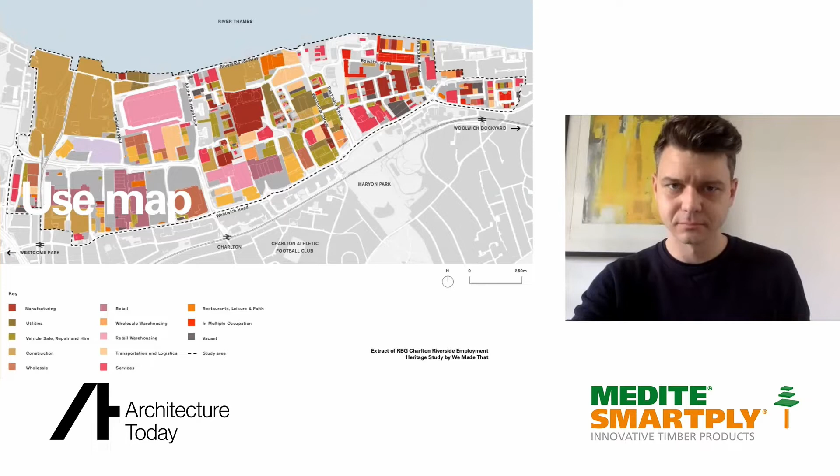The Charlton Riverside area, like all areas of London, is under immense pressure to transform and move with the times. And this is an extract of the Charlton Riverside SPD that imagines a mixed-use development coming forward for the area, and certainly changing drastically from the industrious heritage.

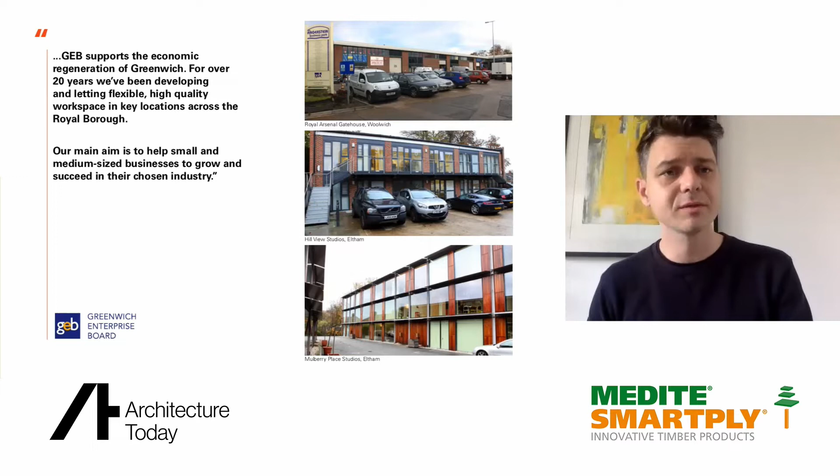So we were approached by the Greenwich Enterprise Board, who are a small organisation that act as landlords, providing industrious tenancy or premises for light industrial, small, medium-sized businesses. Their ethos is really about providing very good quality workplace that's suitable for making, creating, manufacturing, distributing, but to do so at an affordable rate, and provide letting arrangements that are flexible and allow businesses to move, expand, contract, and really foster growing enterprise.

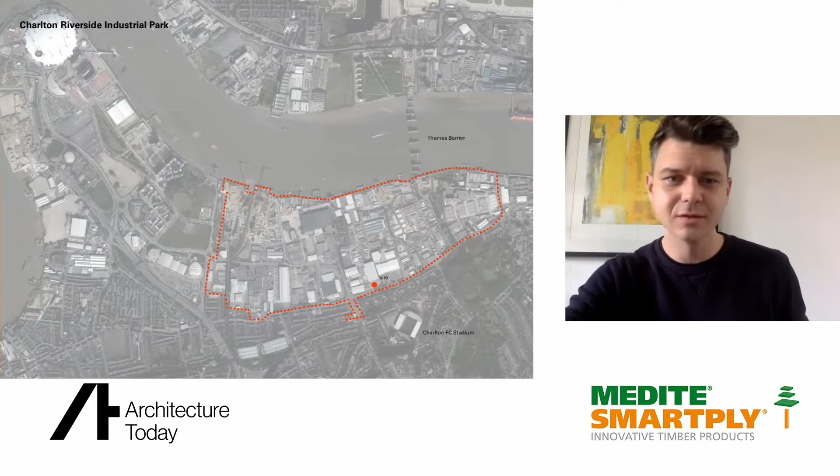So the site itself is located on the south of the Charlton Riverside industrial area. It's located on Woolwich Road. You can see the Thames Barrier Park there, and the Charlton Football Stadium to the bottom of the screen. The site's really nestled right on that southern periphery of the industrial area, and our immediate neighbours are Selco, building merchants, with an industrial park to the east there that provides large-scale retail.

But to the south of Woolwich Road, it's defined very residential, and it's that periphery that's very interesting for the site, that periphery condition.

Our approach for the site was really in review of the site conditions, and we established that this periphery condition that the site has on the industrial park gave us the opportunity of creating a billboard feature for the site that is in part signposting the industrial uses for the area, but also needs to be of architectural merit.

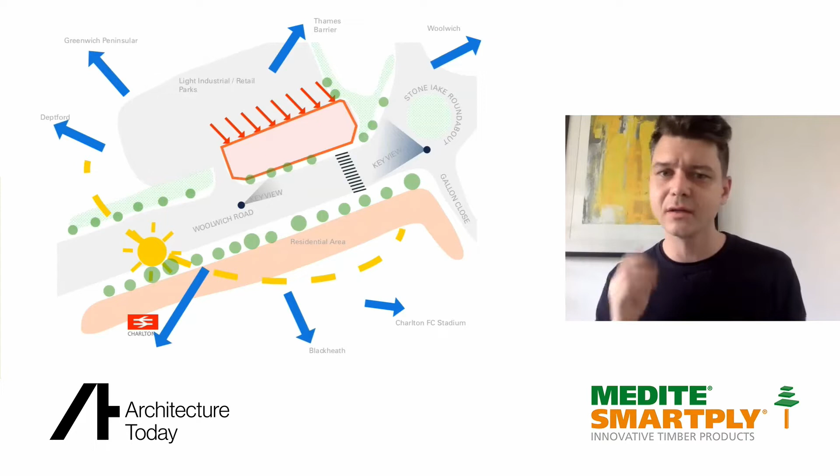This would create a pleasant visual connection or approach from Woolwich Road, of which there are two key viewing axes of the building, from the roundabout on the right hand side of the image and Woolwich Road to the left.

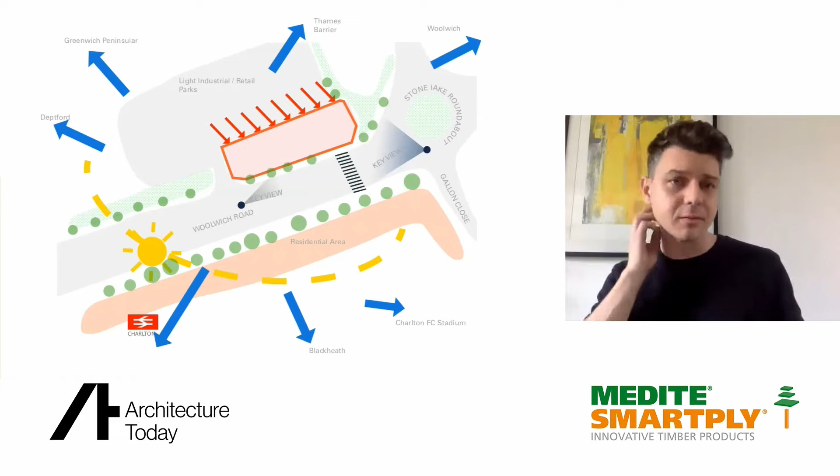We were aware that once you get above the first or second floor, amazing view corridors open up around the site, and these are shown in the blue arrows towards the barrier, Greenwich Peninsula, even towards the stadium I mentioned.

The other key consideration for us is the solar diagram, shown in yellow. The site benefits from really great daytime solar sun aspect as the sun moves around the south, but we're very aware that could lead to quite intense sun or solar gains from the west and setting sun.

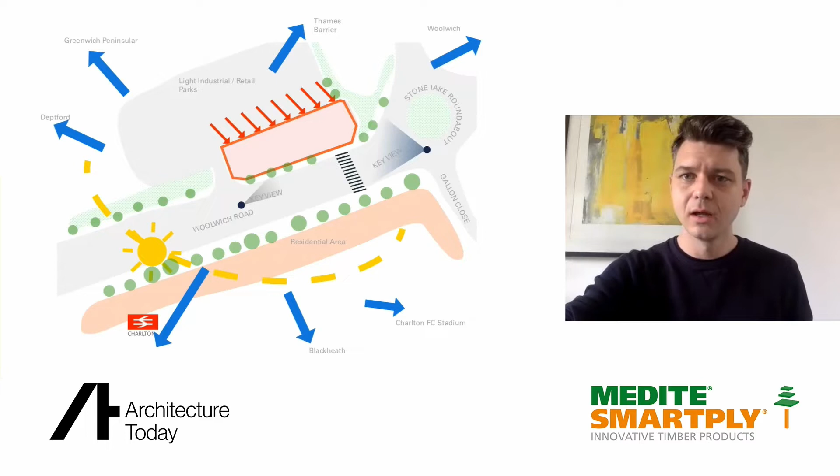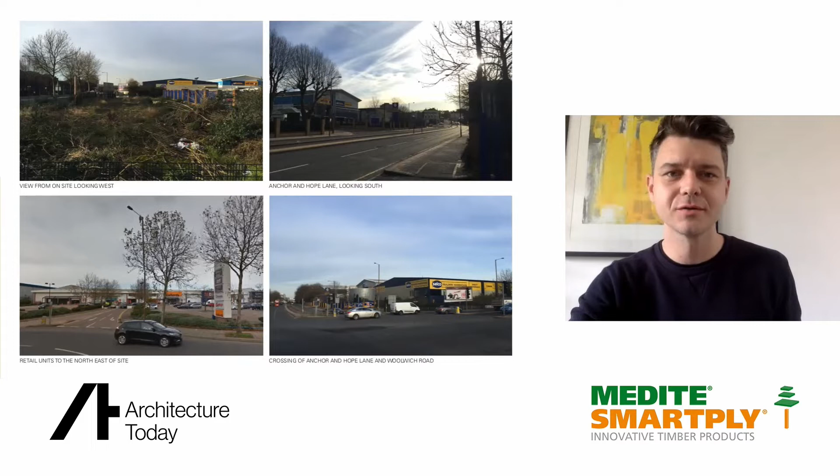In terms of the site, it's pretty much what you would expect from this part of London. Very large industrial sheds for retail and industrial uses, and the site itself quite overgrown and unkempt.

Our brief from GEB was to create approximately 14 workshop units that would be around 100 square metres in size, ideally with standardised proportions.

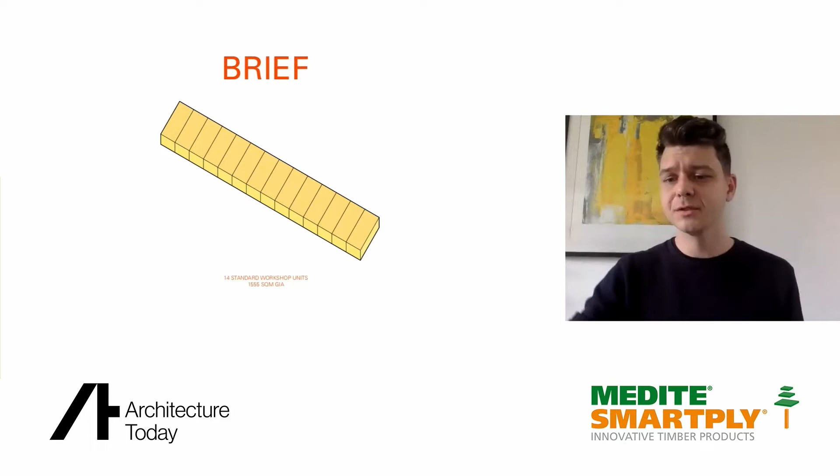So we came up with a diagram whereby we would have servicing provisions, loading and the like on the ground floor, and then a series of units that are stacked vertically on the site and accessed through a lift and stair placed at the back.

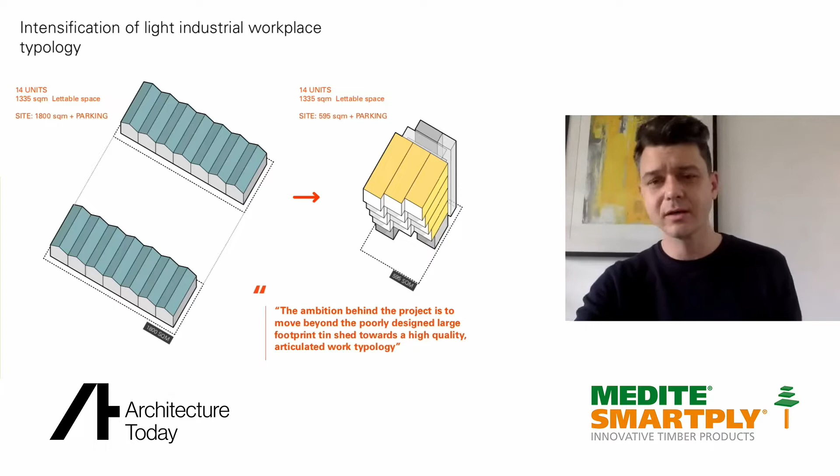This vastly reduces the site area required to create these units. You can see approximately 1,800 square metres on the left for the low-rise sheds, and just shy of 600 square metres building footprint for our version. So a very efficient way of creating the floor area needed.

We then carved away a profiled, progressive cantilever to the west side, which allowed various lengths of unit to be created within the building. This would allow the units to appease different types of users, but also ideally allow users to move throughout the building as their operations expanded or contracted.

The cantilever also assists the solar shading to the west, providing more shading to that aspect and hopefully reducing the solar gain in the afternoons, and creates this visually arresting profile. So the image on the right is the final building.

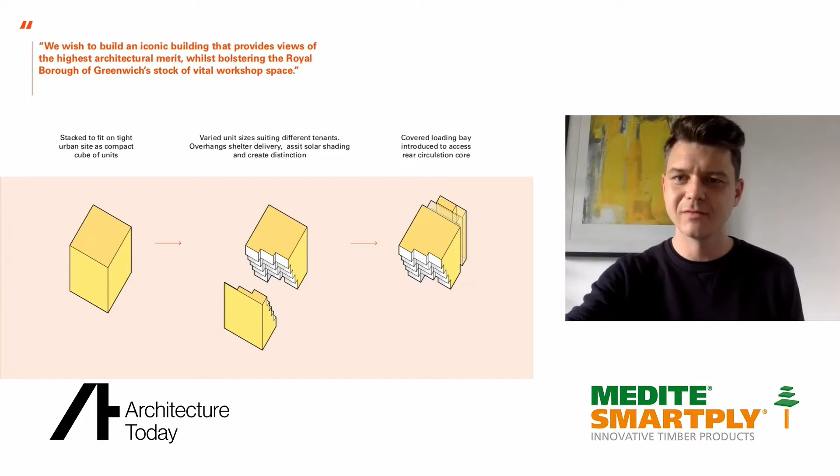As a practice, we have a keen interest in timber buildings, and this was really an opportunity to explore that typology and construction method in further detail. We really like this analogy of the log stack arrangement, whereby the building is created of timber, and the lengths of timber are effectively changed to suit this progressive cantilevering form that expands on the west side.

To talk about the arrangement of the building, the ground floor works quite hard in providing the main entrance and the basis of the vertical circulation through the building.

There's a central loading bay sized to allow a goods vehicle to come and reverse in, with direct access to the lobby and goods lift. There's then a stair in the top right hand side of the diagram, allowing movement through the building, and otherwise a bin store completes the communal services of the building, with 2 individual units on the ground floor.

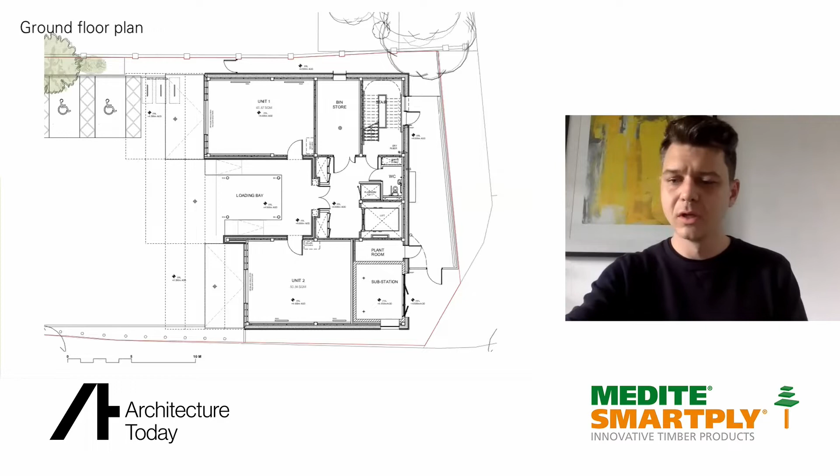There are then 3 units on each floor as you move up the building, arranged as shown in the plan, all accessed from that main circulation lift.

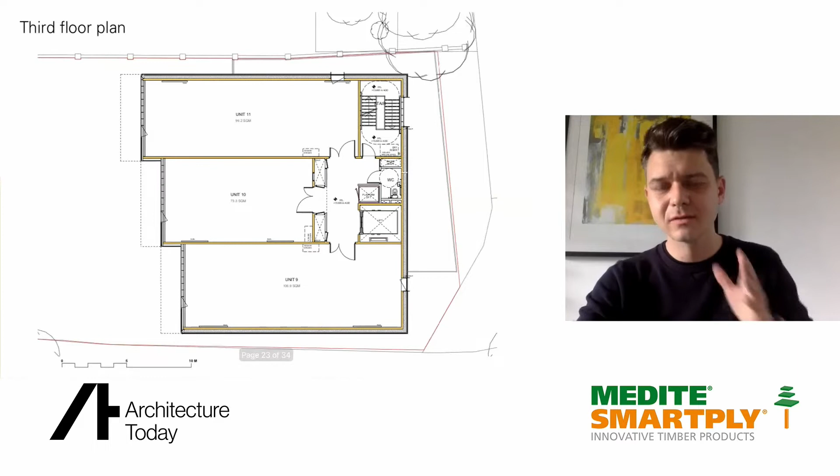As you move up the building, the progressive cantilever means that the size of the units expands up the building, creating units up to 115 square metres at the top.

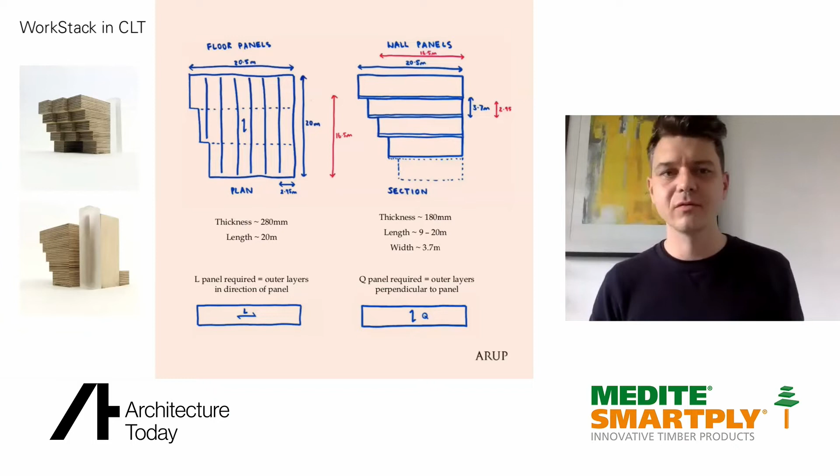One thing to say on the structure is that all the cross-laminated timber is left exposed in the interior of the building. For fire control, the width of timber allowed provides for a charring zone on one side of the timber. So if there's a fire, the outer surface will char and become impervious to further deformation of the overall panel—a very efficient and elegant way of controlling fire within the building.

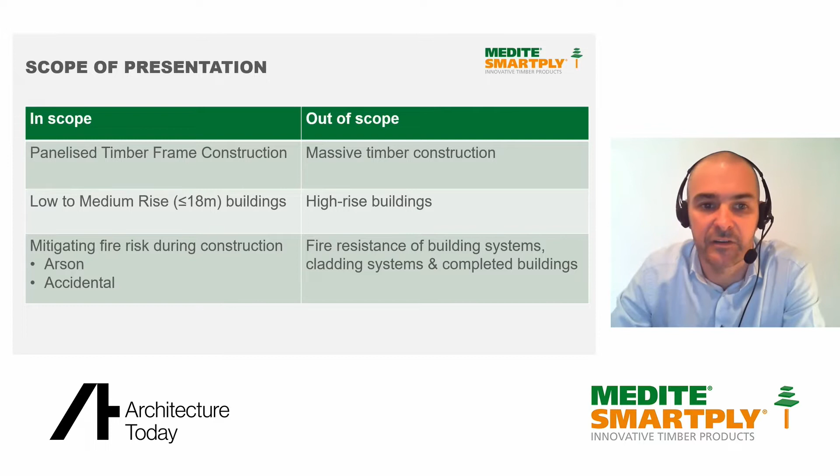Getting straight into it, let's look at the benefits of flame retardant treatment. There are 4 stages in a fire: ignition, fire growth, the fire fully develops, and the fire decays. Fire needs 3 components to start and keep going: a heat source, a fuel source, and oxygen.

As the fire continues to grow, it continues to consume the fire load, the furniture and everything in the room, eating away at that fire load. Eventually when the fire load is gone, it decays over time. The important part is that from ignition, the fire growth stages are very rapid and the temperature rise is quite severe.

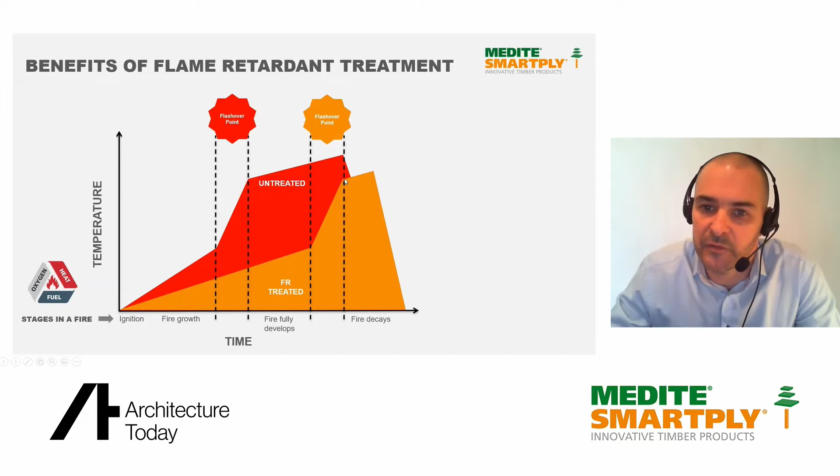The same thing happens once flashover happens. The fire engulfs the room, really consumes all of the wood, all of the materials in the room, and eventually it dies out in the same way.

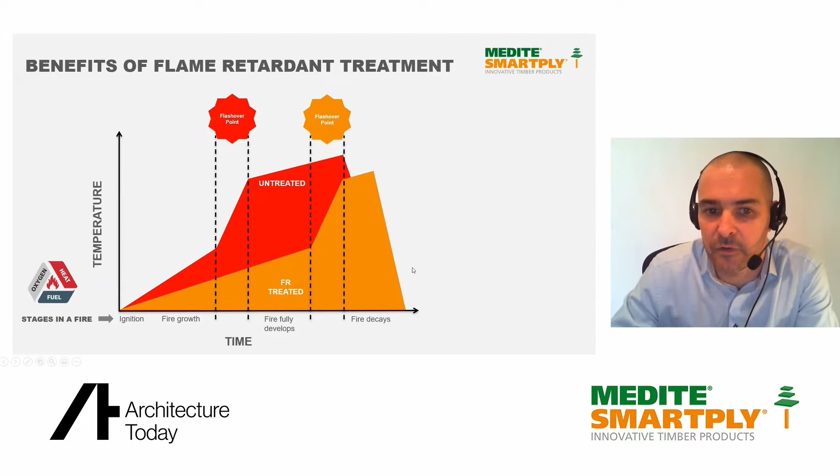The key to performance here is the enhanced reaction to fire properties of the treated wood, which slow down the growth phase of the fire, preventing that small fire from becoming a big one. This gives occupants time to escape the building, or site workers time to escape during construction. Small fires will be extinguished more quickly, preventing damage, and are far more effective than firefighting a fully developed fire.

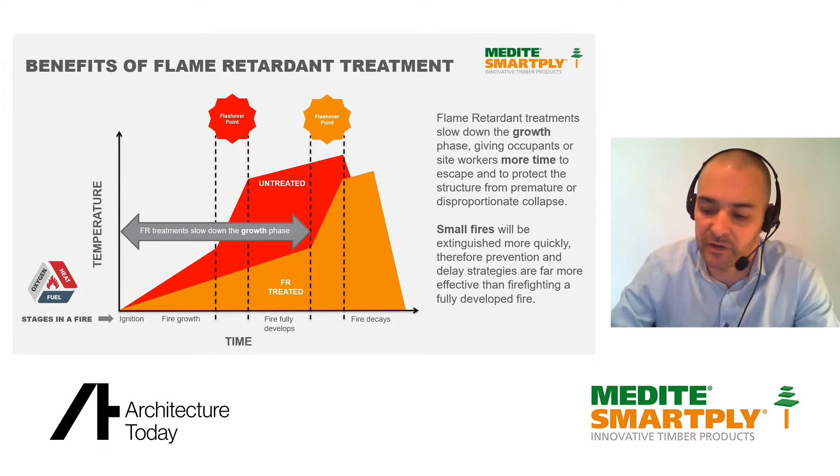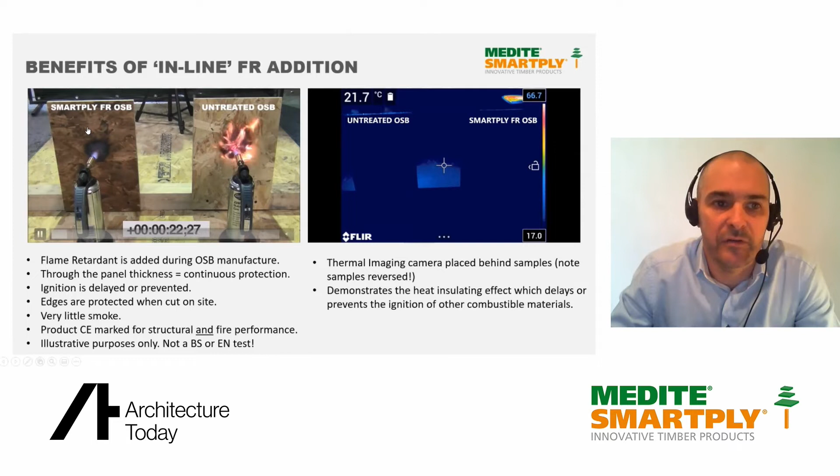Moving on to look at the benefits of inline FR addition, what I mean by that is where we add the flame retardant during the OSB manufacture. You can see here two OSB samples, one FR treated and one untreated, and on the right-hand side, the same samples from the reverse.

You can see we have a thermal imaging camera here at the back, so the samples are reversed. You're looking at the untreated one here on the left and the treated one on the right.

Immediately you can see untreated OSB catches fire and ignites very, very quickly after ignition, whereas the treated sample continues to char. You can see it's still a very hot surface on the board, but crucially it's not igniting, and the charring is protecting the timber beneath.

This is the benefit of a wood panel that's treated during manufacture. You have that FR treatment the whole way through the panel, so you have continuous protection, and ignition is delayed or even prevented. The benefit of this is when panels are used in a factory or on site, the edges are protected, so it's no issue when you cut the panels on site.

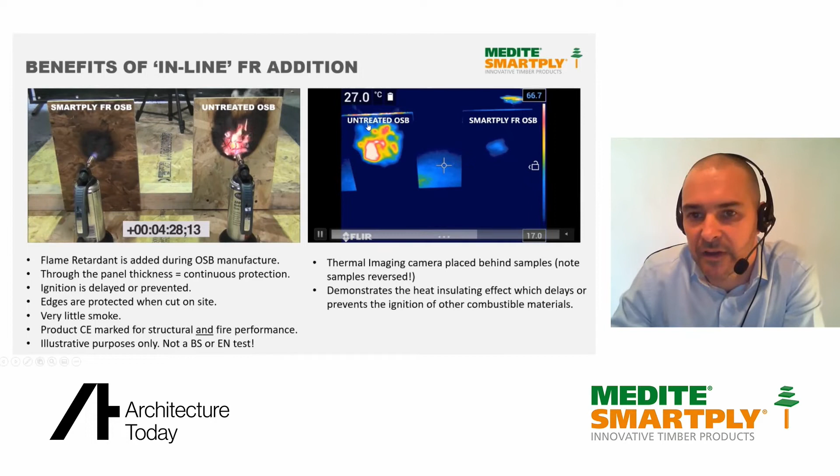Here you can see after 4.5 minutes, the untreated sample has burnt through. You can see the smoke here at the background after a very short time frame, and on the heat sensor camera you can see significant heat as the fire has burnt through. On the treated sample, you can see that the charring rate is actually helping to insulate the panel as well.

So this is an additional benefit of a flame retardant treatment. It prevents, it keeps that temperature lower, so it can prevent other combustible materials from igniting in the background. Also, there's very little smoke produced here.

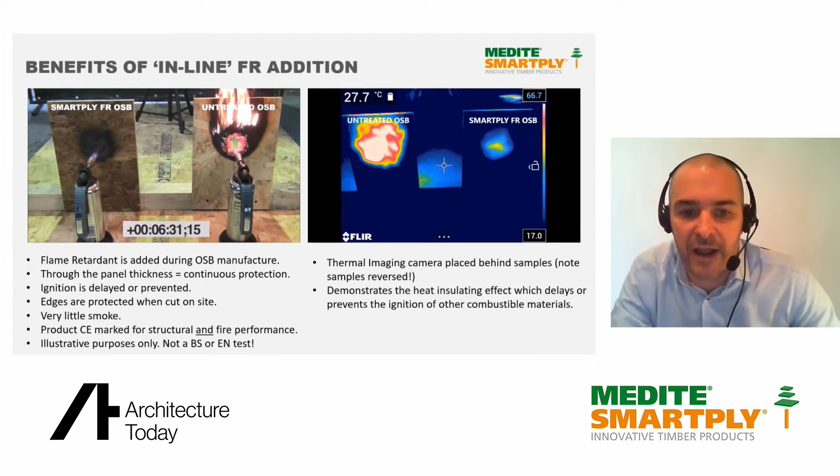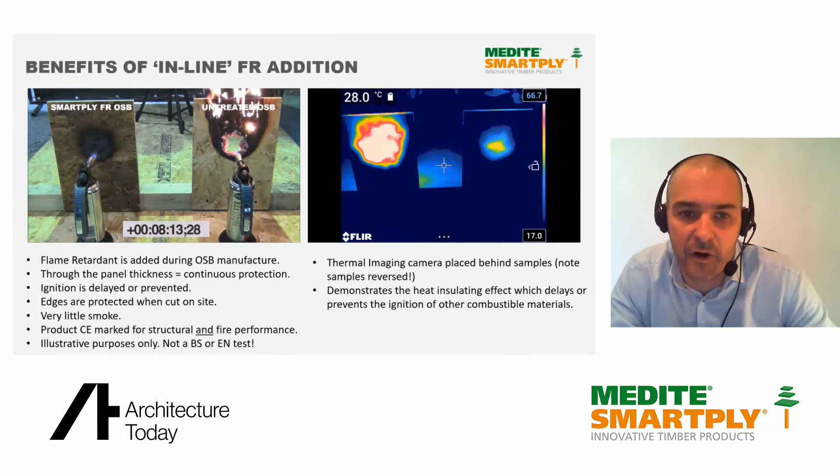This is purely for illustrative purposes only. It's not a BS or an EN test. This was part of our R&D as we were developing the product. We'll look at more formal testing a little bit later on.

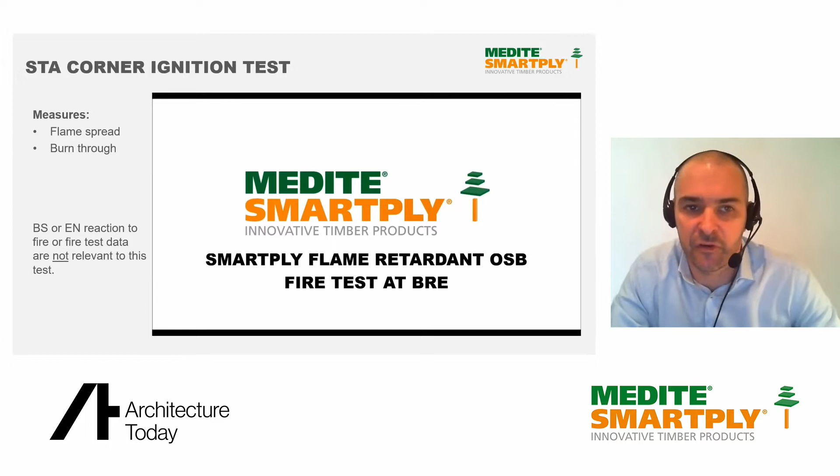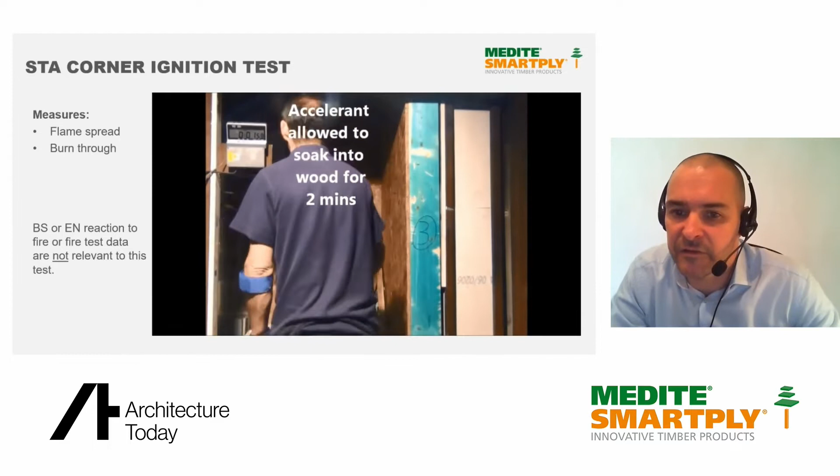So first of all, the first test that we had to do as part of this STA testing was called the corner ignition test. This measures flame spread and burn through. As you can see, it's slightly different to the SBI test for Euroclass in that the crib formation here resembles an arson attack. It is offcuts of timber and sawdust and paper that would be found on a typical building site, helped along with an accelerant like petrol or whatever.

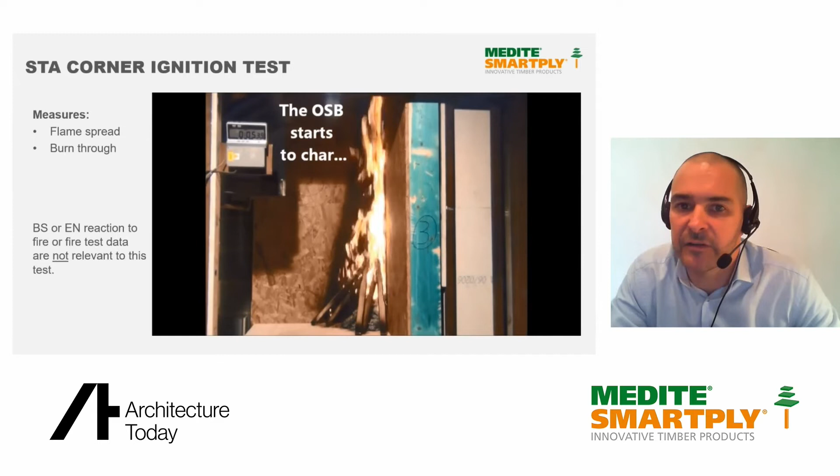And immediately you can see here that the OSB is doing its job. It's starting to char, and this is due to a chemical reaction between the FR chemical and the OSB. So immediately you have a very intense fire that is suppressed by the FR OSB, and that's the key to success in the product.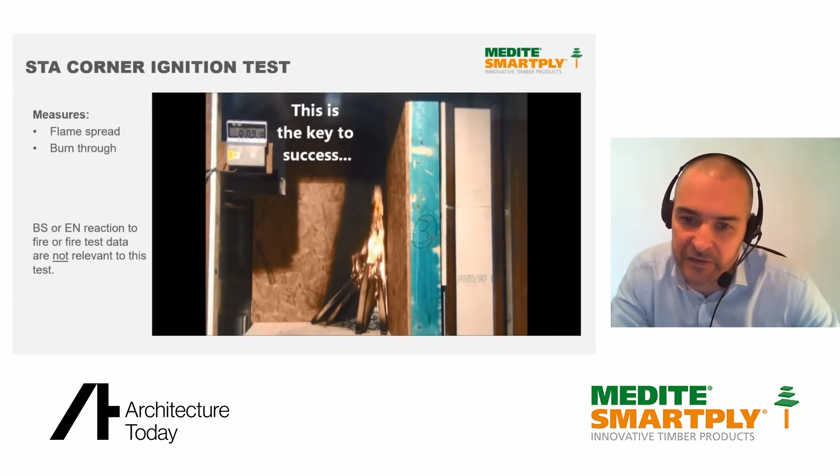The char layer continues to grow, and you can see that the additional fuel source to the fire is cut off. Now, what this does after a few minutes is you can see, even though the fire is fading, the height is dropping down.

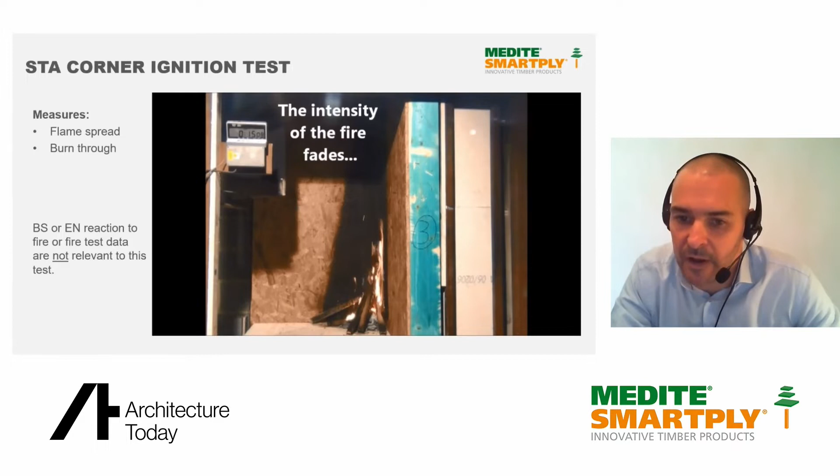Just about now, you can see a secondary fire is growing and developing. And you can see that second burst of flames as the wood sticks fall into the fire, and the fire continues to consume the fire load.

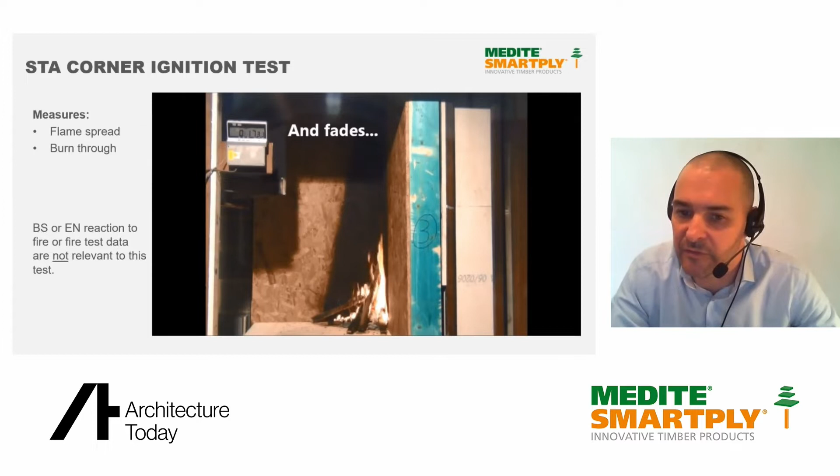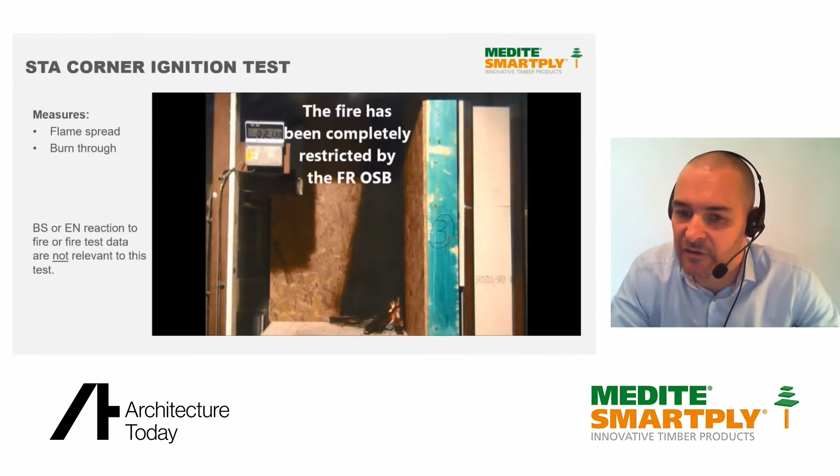Why it's important to measure this: you think the fire is gone at this stage, but really if you look in the corner of the OSB there, it's a very, very hot, intense ball of fire in that corner. And if that continues to grow, if the board isn't treated behind it, then it will penetrate the board and it can develop into a full-size fire.

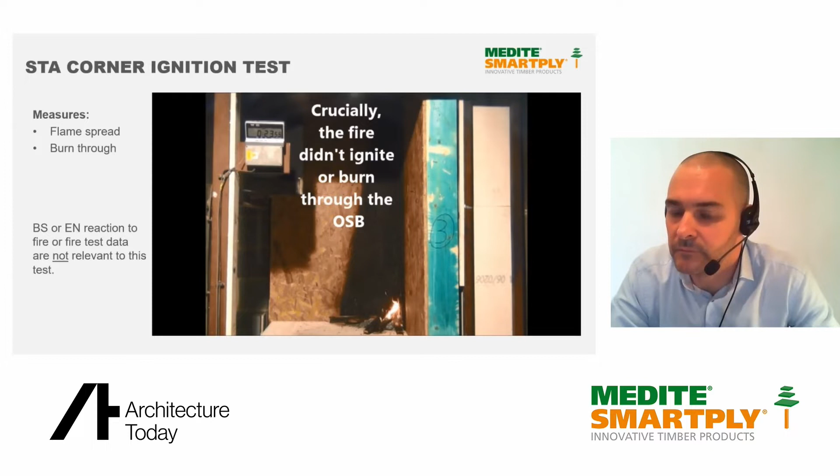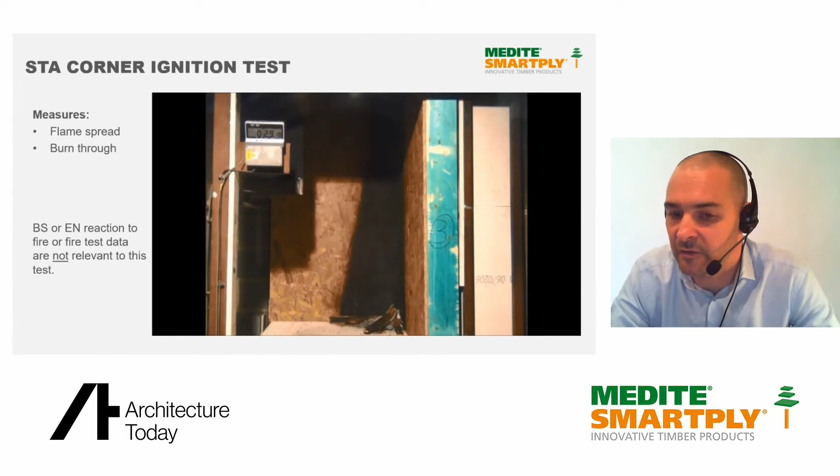So crucially, the OSB held back the fire and didn't allow it to grow. And obviously, in a real-life situation, that would prevent the fire from spreading across the building. After 30 minutes, the fire eventually dies out.

It's a 40-minute test. What this doesn't indicate is 30 minutes fire resistance - that is a completely different thing. We covered that in a separate AT webinar last year, but there are similarities. The important thing here is that the flame spread and the burn through are restricted by the flame retardant OSB.

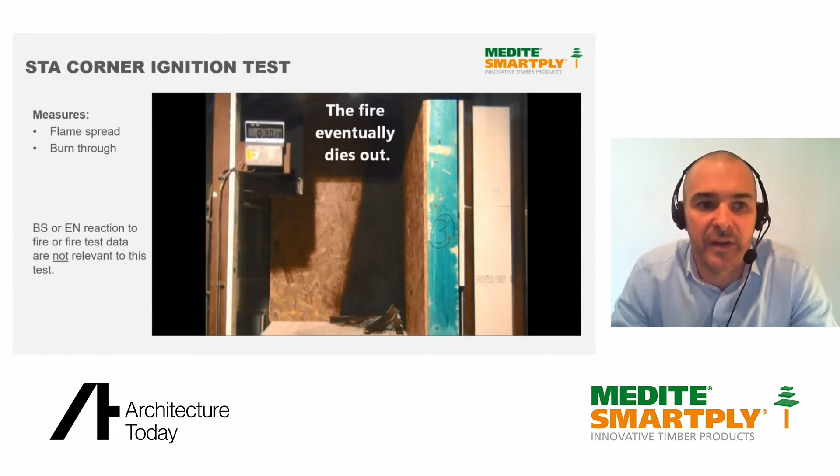The next test, from passing the ignition test, the next test we had to pass is called the small room test.

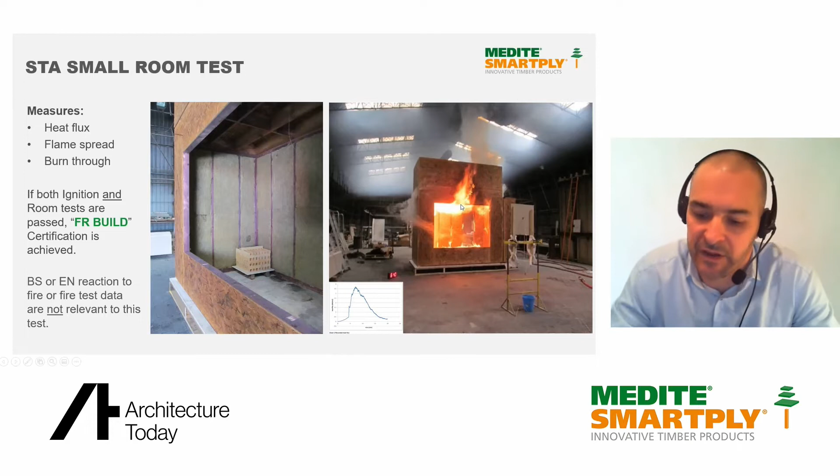You can see that the FR OSB in the floor is now being attacked by the full rigors of this fully developed fire at flashover, and also the flames are attacking the FR sheathing on the outside. So the aim of this test is to prevent burn through of the floor and also no ignition in the sheathing. So how does this look in practice then?

We look at a worked example of separating distance using the STA separating distance guidance. If we look at an example of a new timber frame building being built beside an existing row of houses, we want to know what the separating distance is between the two buildings. Assuming a 4-story building and a 19-meter length, here it is in section and here it is in plan. We want to work out the distance between these two buildings and what can be done safely.

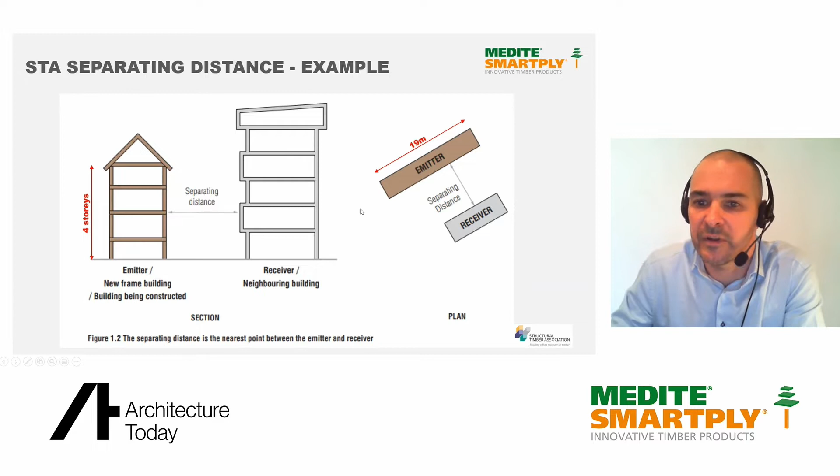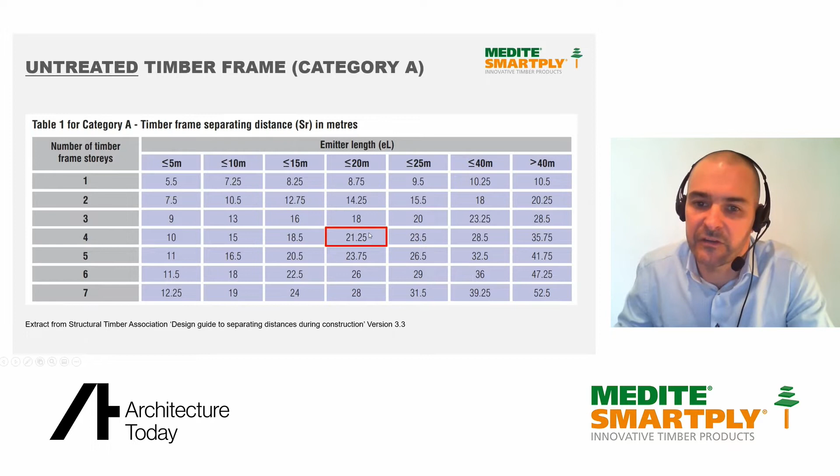First, looking at untreated, category A. This is a table taken from the guidance, and it looks at the number of timber frame stories and the emitter length. Looking back at the diagram, if we go down to 4 stories and across to 19 meters, you can see that the separating distance is 21.25 meters.

Next, looking at category B3, which is FR treated, and this is where SmartPly's wall and floor system will fit in. Again, you come down to 4 stories and across to 19 meters, and you can see the separating distance has been reduced to 12.25 meters. So effectively here, you've reduced the separating distance by 9 meters by using flame retardant materials in the build.

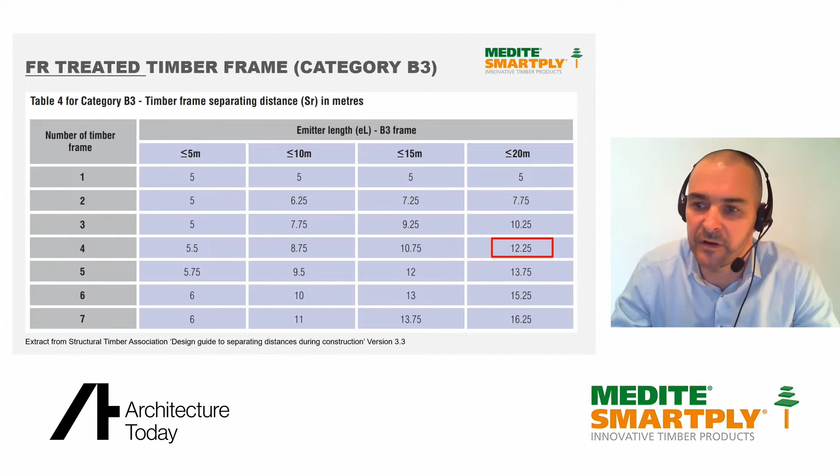And that's a significant amount of value in terms of real estate in built up areas, towns and cities and so on. So that's the theory of it.

In such a short presentation there's obviously a lot of data and certification in the background of these products, but just looking at some recent projects we've completed on site: the picture on the left is the product FR build in a flooring application in an affordable homes development in East Sussex by Gibbs Timber Frame. The middle photograph is again a flooring application, a 7-story building in Liverpool for student accommodation. I believe it was 6 stories on top of the masonry ground floor, obviously a combination — you can see timber frame and masonry there in the background as well. A good example of the flame retardant board being used in medium rise construction.

The photograph on the right is slightly different. This is an 18mm FR panel used as wall sheathing, designed by the structural and fire engineers from first principles. The reason 18mm FR OSB Euroclass B was chosen for this was, first, to give enhanced fire safety in the cavity, and second, to give increased fixability of these helping hand brackets, which are fixed into the sheathing and used to fix the rain screen cladding onto the brackets.

The problem with using non-combustible boards, or some of them, is they're quite brittle, so they can break when fixings are attached into the side of the wall, whereas the OSB provided very solid grounds for fixing these helping hand brackets. So that's another great example of how, in medium rise buildings, FR products can solve the challenges relating to fires.

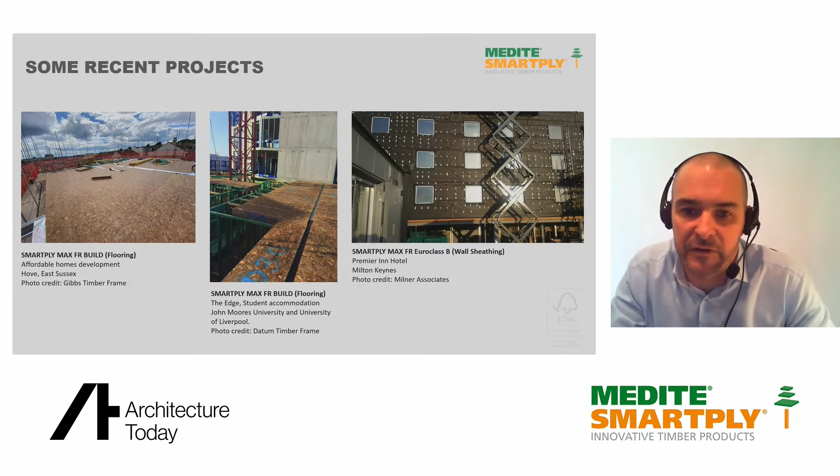It was fascinating to see just how rigorous those fire tests were, and also how pleased developers will be when you can cut down separation distances. We're getting some great questions in to fuel our discussion at the end. Please do keep sending those questions. I'm sure there will be more things triggered by our next speaker, who is Anna Beckett of Webb Yates Engineers.

I work for Webb Yates Engineers, and we are structural and building services engineers. We have a very big low carbon focus, so we do a lot of work with timber, but we also work with lots of other low carbon materials, and try to put sustainability right at the top of the agenda for our projects.

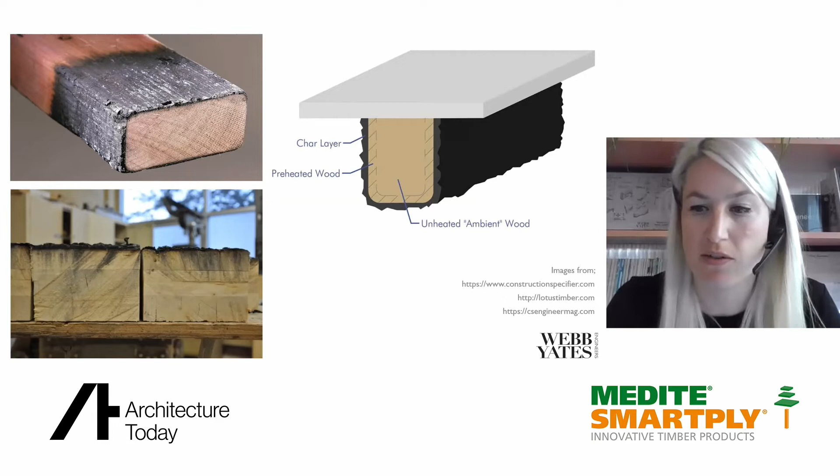So it's quite interesting that it has this stigma that it's timber and so it will definitely burn, and actually in this situation it wasn't the CLT that there was an issue with, it was the steel around it.

So the first two projects I've talked about are commercial office buildings, and the much bigger issue is when you come to try to use timber in residential buildings, since most of the requirements from the Hackitt report refer to residential buildings. In reality, those stipulations about limiting combustible materials in the facade and the use of timber as a risk-averse approach often get applied on commercial buildings as well, but obviously when you're building a residential building, they are much more important.

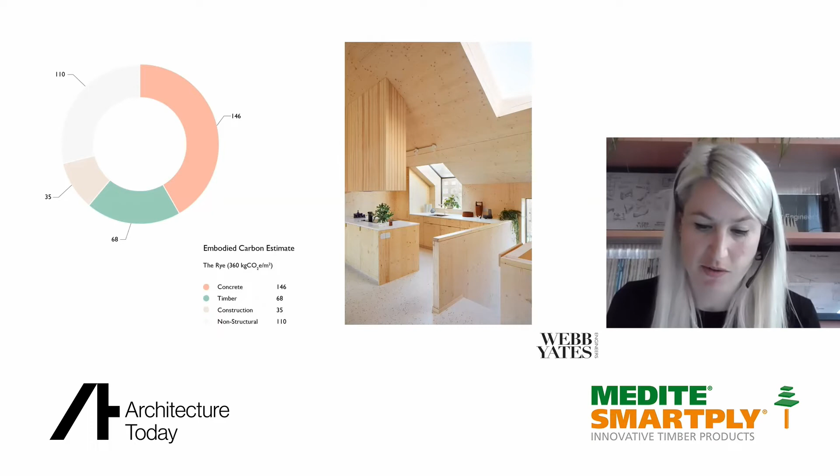Again, on this project, the embodied carbon is significantly reduced by using CLT. So it has massive benefits. It's a really warm space for the residents. It's just overcoming the sort of stigmas attached to that.

The last thing I was going to mention is that it's much more likely that sprinklers are going to be required on the project, and I believe it's kind of like misting sprinklers that are usually needed. This isn't a project with sprinklers - as I said earlier, lots of these things we don't have projects where they are included yet, so I've just given you a picture of one of our other timber projects. But we found that it's really important to have the conversations about fire early on, because things like sprinklers are often required on projects where you wouldn't necessarily expect them to be required.

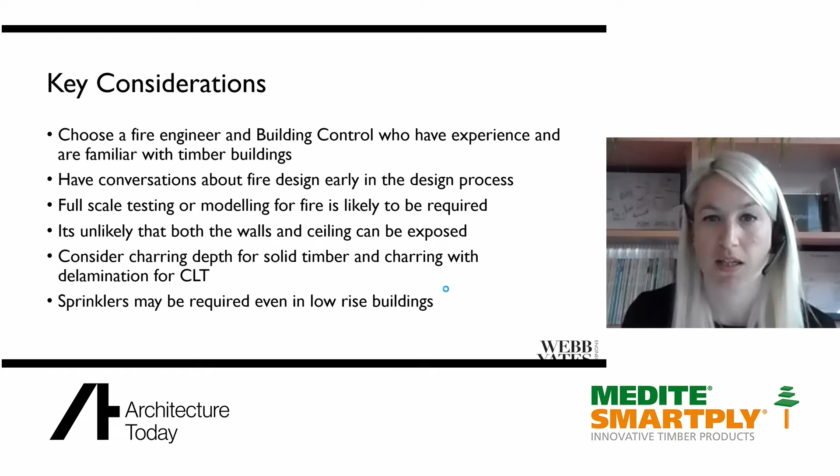So just to summarize the key considerations we found: firstly, choosing a fire engineer and building control who have experience with timber and are familiar with working with timber buildings, and it's really important to start having those conversations early on in the design process. It's likely that in a taller building, full-scale testing or more advanced modelling for fire is likely to be required, and it's unlikely that both the walls and the ceiling in a CLT structure are going to be able to be exposed. When looking at any exposed timber, the charring depth needs to be considered, and in CLT, the charring depth needs to be considered with the possible impact of delamination. And finally, that sprinklers might be required even in low-rise buildings.

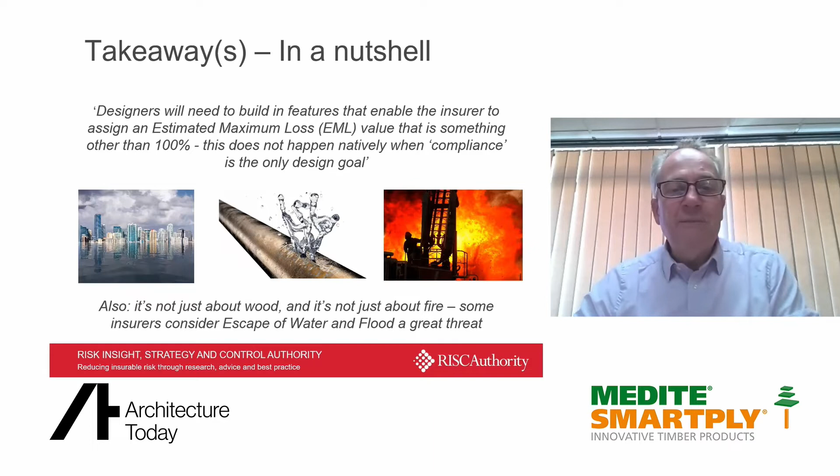Now, the insurance perils we're considering as part of this undertaking include fire, escape of water, and flood, and these contribute to different insured loss types, including material damage, business interruption, loss of stock, loss of rent, and displacement costs. Now, a little bit more on estimated maximum loss.

But we've got to consider other design features that may stop this model from working. I hope you can see this is a hard-earned feature for any building to have. It implies high levels of compartmentation, no external fire spread, and that the structure of the building remains sound throughout the fire.

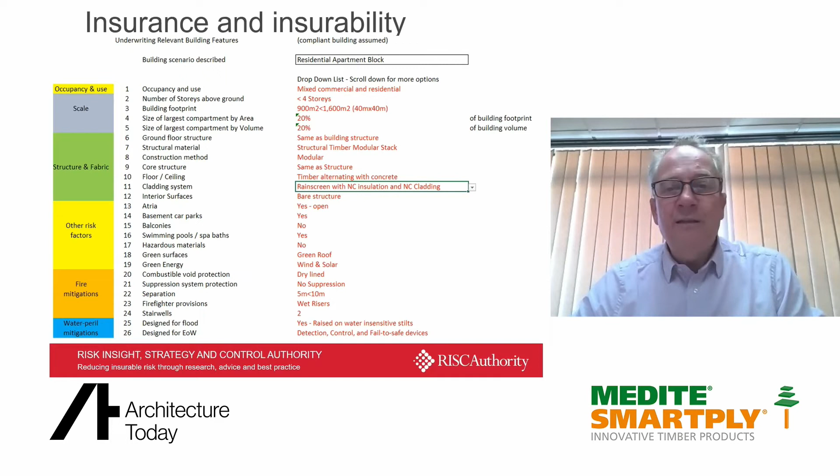There are other risk factors too, such as the inclusion of atria, balconies, basement car parks, green surfaces, green energy, etc. And they can all be offset somewhat by measures to mitigate fire, such as protecting voids, inclusion of suppression systems, and measures to mitigate the challenges of water, specifically building features designed to protect against flood and escape of water issues.

Now the other thing to consider is the relevant types and periods of insurance that can be impacted. We're very used to construction—I don't think I need to say too much about that because we've had a lot of experience with light timber frame. Material damage and business interruption is very simple to understand also. What might be less known is the potential impact that moving to a more wooden-based large building method can mean for latent defects.

Latent defects insurance is normally associated with fixing small-scale defects, such as leaking windows and leaking roofs, for a period of 12 or 15 years into the building's life. There's no element that would protect against anything that might cause a building to collapse. But now there is consideration being given to some of the massive timber techniques and the potential response of some materials to water damage, which may create potential for severe structural implications for the building under latent defects cover. That takes us into a very different realm of insurance.

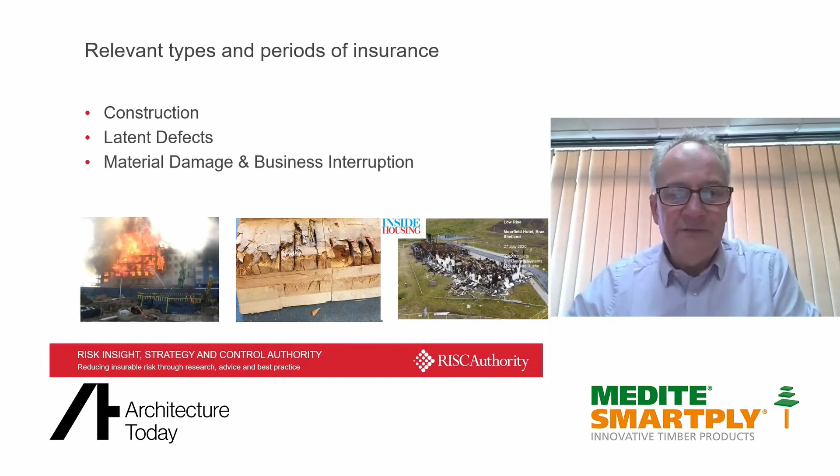Many things actually impact the overall cost of insurance. I won't go through these in detail, but when dealing with a new building method, repairability considerations, availability of new materials, and whether anyone can actually assess the extent of damage all become important features that can modify the cost or indeed the insurer's confidence in understanding what they're taking on.

Through RISCAuthority we produce a wide range of documents, including a suite of essential principles which is a good starting point for anyone wishing to understand the insurer mindset for risk, particularly when it comes to building susceptibility to overall resilience, fire, flood, and escape of water issues.

Now, obviously others will be talking about this in great detail, I'm sure, but they're huge and very meaningful drivers to a net zero future. It does seem to be being done with quite a single-minded form, and there is concern that maybe consideration isn't being given to some of the potential impacts.

Hopefully it can be achieved without reducing safety, but we've already seen implications with other building methods that have ramifications for property resilience, business resilience of the work that goes on inside them, the service delivery of any business operating from the buildings, and we also need to consider whether the buildings adequately support the fire and rescue services so they can be effective in this environment. When you group all these things together, there is a big question about whether the move can be done while maintaining the insurability of the building itself.

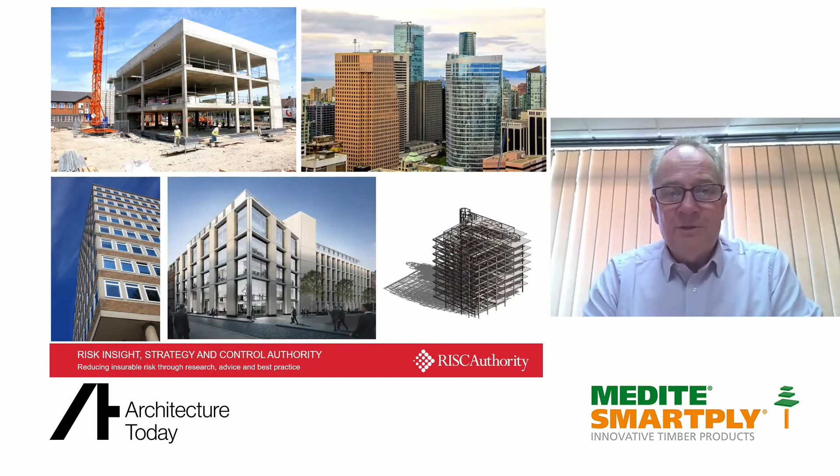So we've moved from a position where we're used to concrete and steel, and we know that as materials, they're pretty good at resisting fire and also water issues. And we're moving to a very new domain of panelized, post and beam, and modular construction, often in association with other green measures such as green energy systems and green walling systems as well. So a very different environment to be moving into.

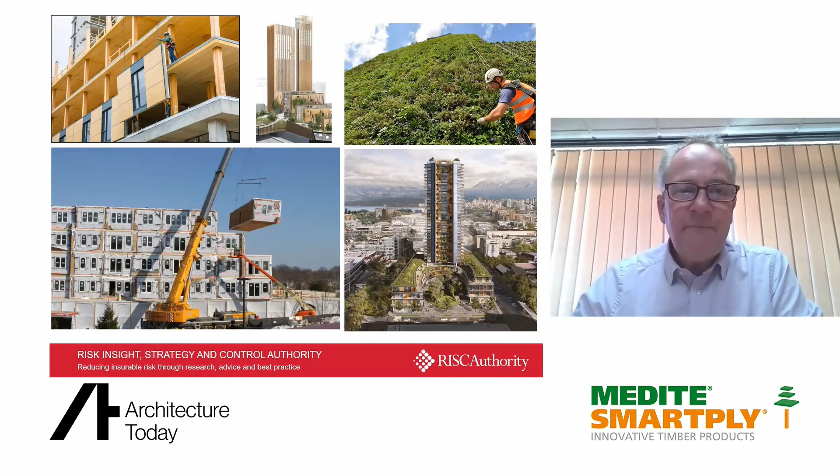I won't dwell on the types of timber construction, but it's worth highlighting. We're talking really very much here about heavy timber framing. We have great experience now of light timber framing, and I must say that it has presented a challenge for insurers in their own right.

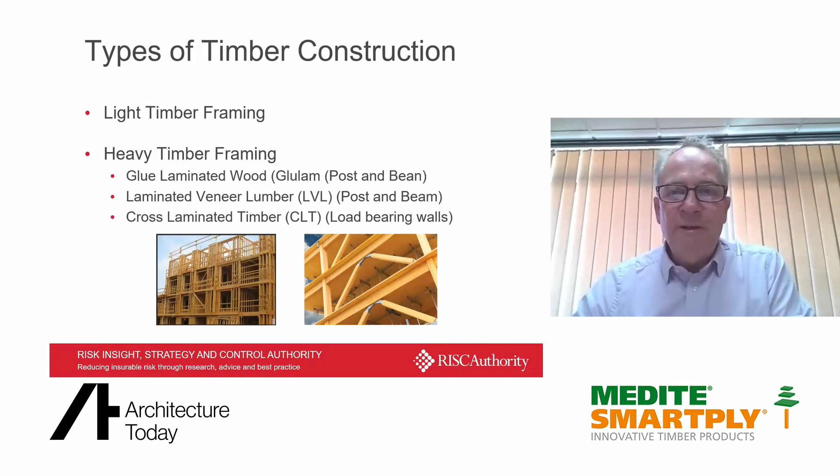Some of those lessons learnt there may cause concern moving forward to other timber-based building methods also. But principally, the types that we have: glulam, laminated veneer lumber, generally used in post and beam type constructions, and panelized systems like cross-laminated timber.

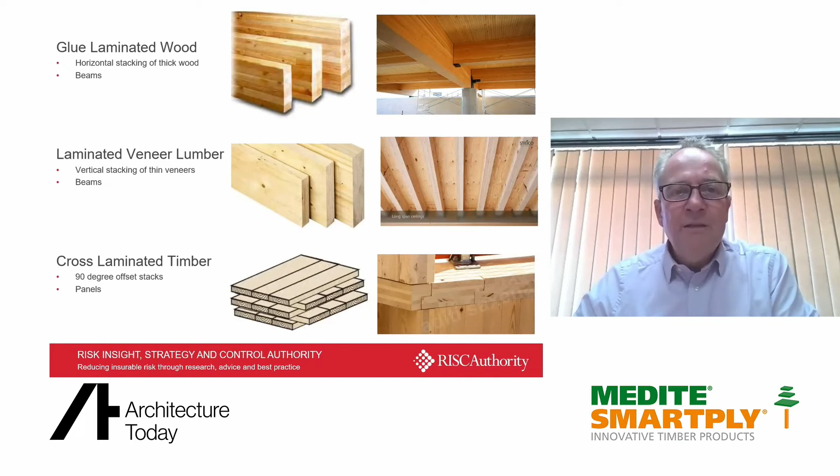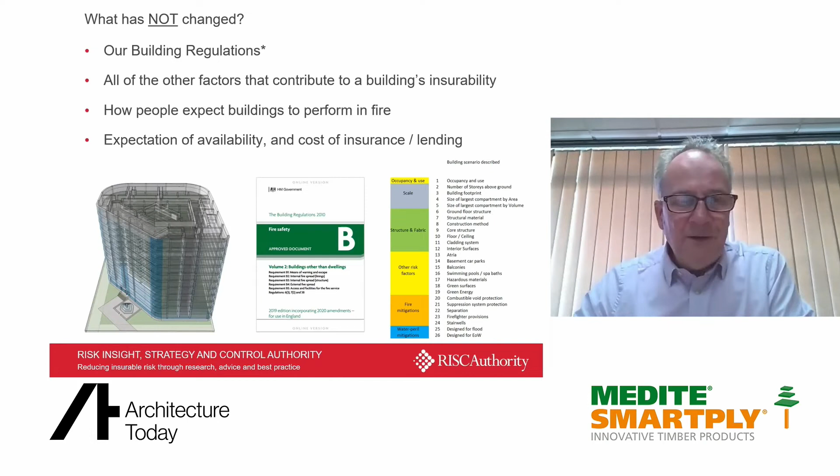Now, I've mentioned building regulations. In the UK, our building regulations have a total divorce of property protection and life safety. So as such, their only focus is really evacuation before collapse. That is to say, in the time that it takes for the fire to take hold of a building and cause it to collapse, it should have been successfully evacuated.

And they do this very well, but it can be at the expense of the level of destruction of the building.

Now, in other countries, they take a different approach where actually life safety follows the passive capability of the building to perform under fire. And certainly in the US, we see language which we certainly don't see in the UK building regulations about preventing collapse, preservation of cultural heritage, and mission continuity.

This is really at the core of business continuity planning and ensuring that there's something left to save at the end of the day. Now, this has led us down a difficult path in the UK.

And we see that the provision of insurance and the capacity of money provided for insurance in the mass timber sector is very problematic. And by definition, it's almost as though the insurers and the lenders are becoming the de facto regulator currently, and that is not a good position for anyone to be in.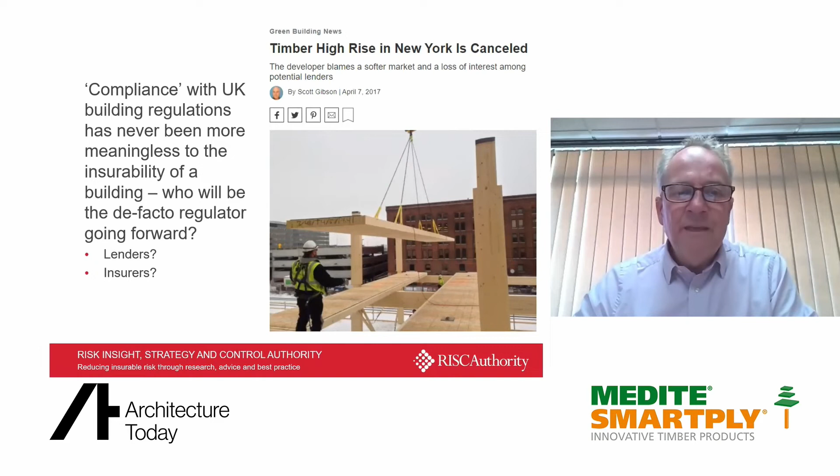So we really do need our regulations to respond to this, or indeed for the designers to start addressing insurers' concerns adequately. If unaddressed, though, we do need to ask ourselves whether this really presents the new norm for us.

Now, in these buildings, nobody died, and they may well have been compliant, but are we really looking at a future where fires end up with buildings on the floor?

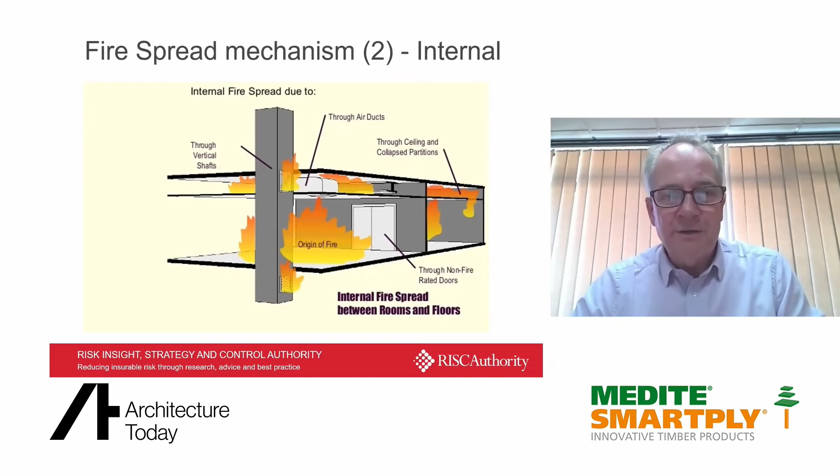Now, insurers are concerned with large-scale fire spread. Three principal mechanisms: we're used to external fire spread, and hopefully post-Grenfell, anything like this reoccurring is a thing of the past. Internal fire spread is very well catered for within our building regulations, and compartmentation is fundamental to the preservation of life. That's the language of fire doors, dampers, and everything else.

But what these new combustible building methods can introduce is really a third mechanism for fire spread, in the shape of combustible voids. Just as a fisherman's net can be described as a lot of holes sewn together, if you actually look at some of these walling structures, the highlighted areas there are all voids.

So actually a wall, rather than being a contiguous non-combustible item, is now really a collection of voids, and that presents opportunities for fires to spread around unnoticed, out of reach of the fire service, and out of reach of any suppression system. And if that is also the structure of the building, it will result in loss of the building.

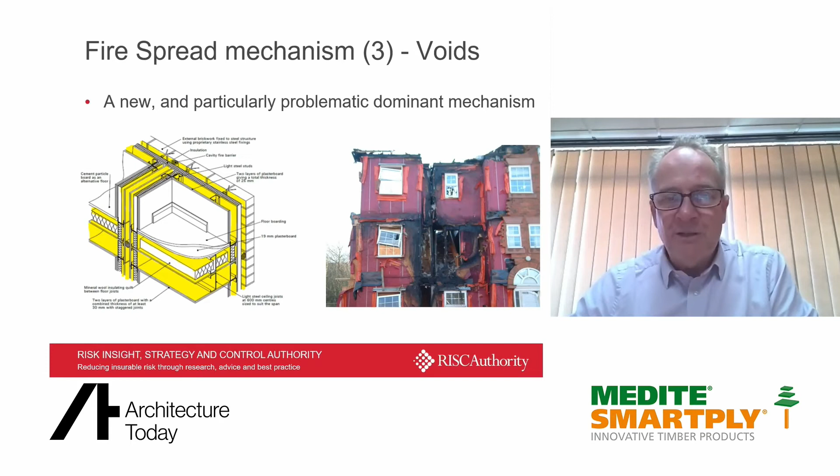So that's on a macro scale, but on a micro scale, there are other changes needed too. Certainly panelized systems can be quite prevalent in the hotel and apartment and residential arena, and this can be problematic if we just look at one key area: bathrooms.

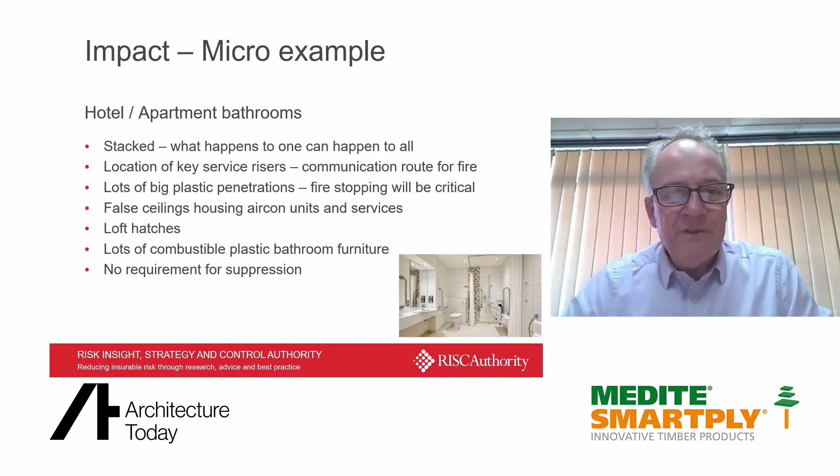Bathrooms are generally stacked one on top of the other, so if fire can spread out of one, it can affect all. It's a location where key services such as risers can communicate fire to all levels. There's lots of plastic in the bathroom furniture and sinks. They have false ceilings, more voids, loft hatches, which can be a weakness. And there's no requirement for suppression because they've historically been considered quite inert.

But when we look at them now, you can certainly see in this sort of environment a need for reinforcement of the fire stopping, because to consider fire actually getting into any of these voids might be almost inconceivable, since they may then be beyond saving.

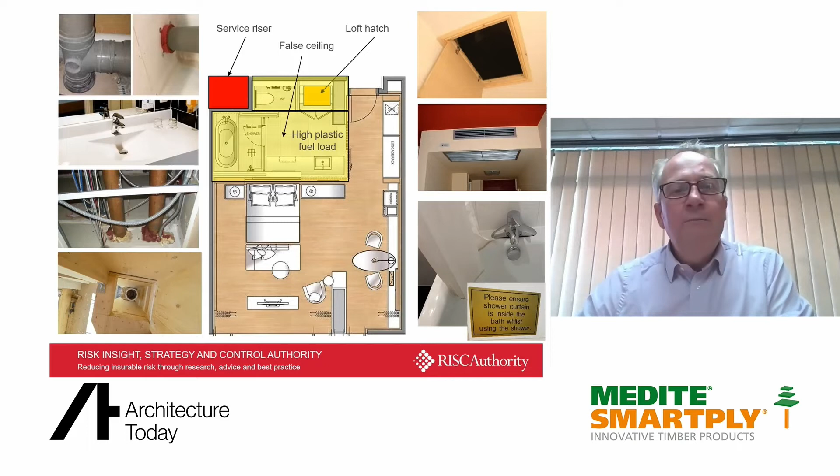If we look at this in the context of fire getting into a combustible void, we know that smouldering combustion can relish the low oxygen environment, eating away for many hours or even days before emerging. And it becomes very difficult to answer the question of what will ultimately put the fire out.

It's not in the realms of any suppression system or the fire service, and we need something to respond to that. But if the whole protection concept of a building of this type relies on ensuring fire cannot get into a void, because if it does the building is lost, that's a very difficult thing to consider.

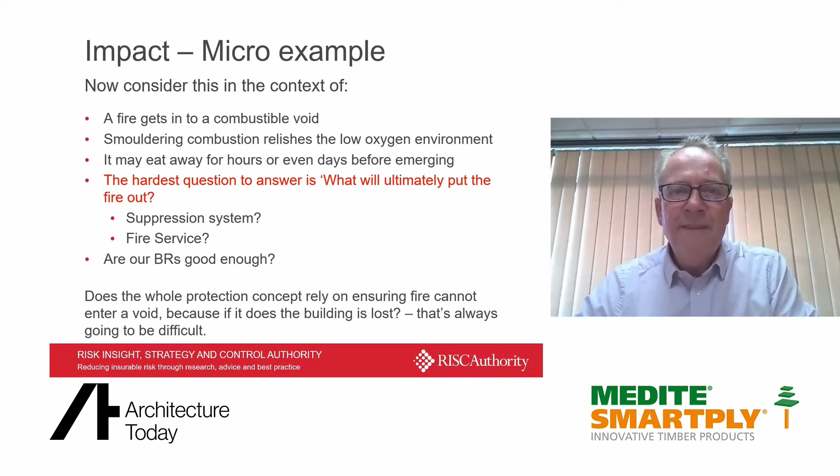Now, obviously, if UK insurers had their way, we'd have buildings made of materials which can't possibly burn, very well compartmented, but they're not going to be pretty. And they'd probably all end up looking like this. These are not the sort of buildings which we need or want.

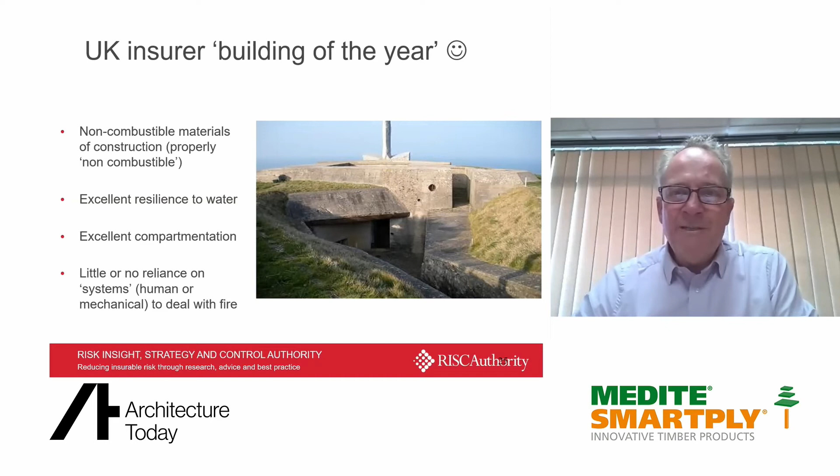So there must be a better way forward. We mentioned previously that building regulations must respond, and certainly when we look to the US and things like the International Building Code, they have responded.

The whole concept of a combustible void doesn't exist because if you have a combustible void, by their building regulations, the materials inside it will be controlled, and they will either be protected by a sprinkler system, or lined out in non-combustible materials, or indeed the void will be filled with non-combustible fibrous material insulations.

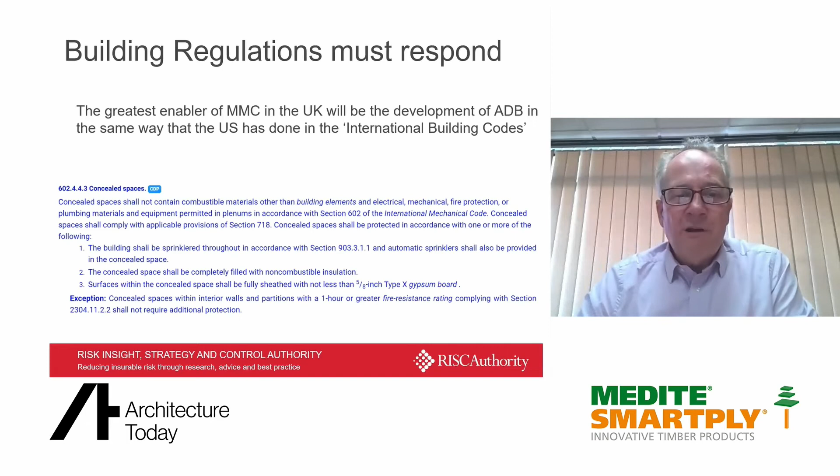So there are ways of dealing with this. We're just being very slow. So the future, probably for acceptable buildings, might be looking at hybrid solutions, where we select the materials in accordance with the risks as they arise.

We know that placing buildings on a concrete plinth can protect against flood and many escape of water challenges. If you build out a concrete core, you may get better support from the fire service with the assured structural stability of the building under fire. It's also a location where all services could be routed in non-combustible ducts, and where kitchens and bathrooms and escape of water hazards can be located.

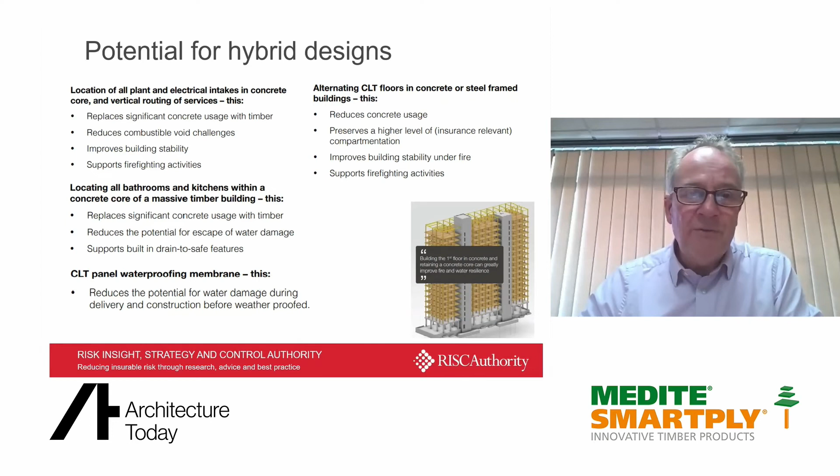So I'm sure that the future will be one of hybridization, and that certainly seems to be the path that many designers are taking. There are some very nice designs coming out which have addressed many of the features of the white paper that have been produced. So it's certainly very encouraging to see.

And let's not always think of the concrete elements as being evil in hybridization, just as wood can be net zero. I'm sure there are low carbon versions of concrete to give the overall environmental credentials that we're actually looking for.

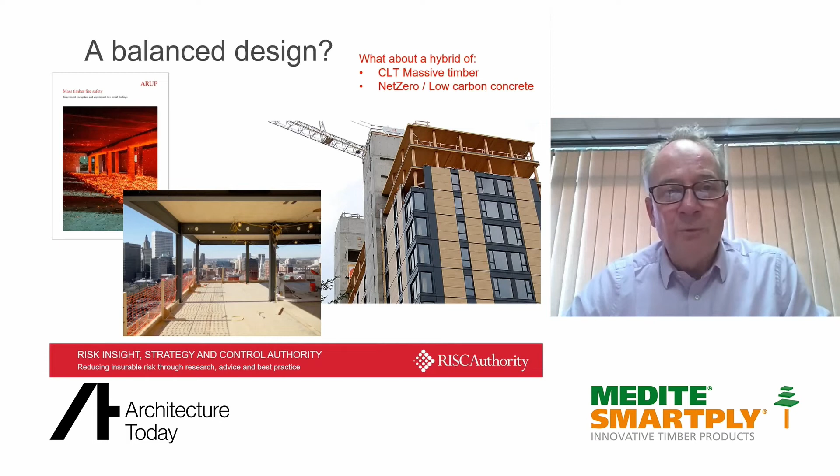So in summary, it's a time of great change. We know that probably wood is the future, but actually it's probably a hybridization of materials that's the future, to produce something which is insurable and livable in.

I do believe that the desire to build is running ahead of some of the research for some of the materials that we've got. There needs to be modification of UK building regulations to change this.

And whilst ply-scrapers seem too difficult to consider currently, we have seen designs at different scale and with forms of hybridization that certainly look very reasonable to me, and hopefully will to insurers in the future also.

But I think the key takeaway is that designers must understand the importance of EML and what they can bring to the table to reduce it from the off.

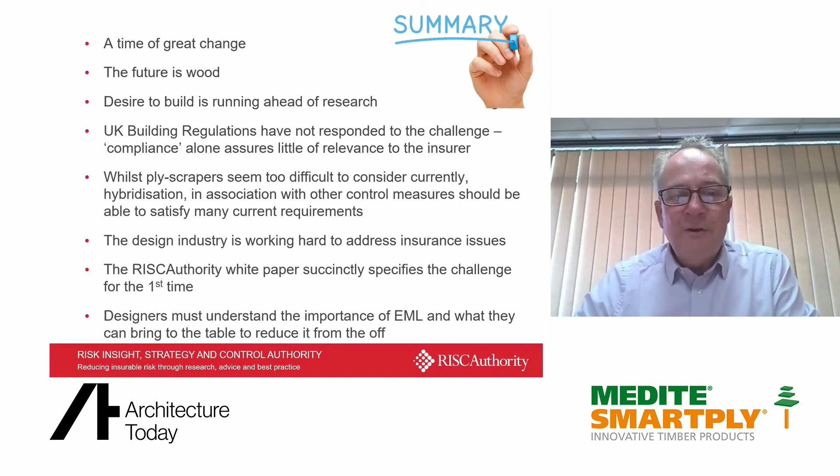I know it's been rushed, but if you want more information, the white paper is downloadable from the RISCAuthority website.

Thank you. I'm not sure I'm ever going to feel the same about being in a hotel bathroom again. Again, lots to think about, some of it a bit worrying, and obviously with big implications. Lots to discuss, so I'm going to bring our panel back in now and address some of the questions that have been sent in. There have been several questions coming in about charring, particularly about what happens after the charring, after that event. Is the structure regainable, or is that something that just has to be thrown away?

I would like to ask Anna first how you look at charring. I think it would depend on the building and the way it has been designed. If you had a kind of sacrificial layer of timber on the outside that you were able to remove, then it might be possible to do some repairs, also depending on how badly affected the building had been by fire. But if you had a bad fire and it had charred all around the elements in the way we were describing, I would expect that you would have to replace some of those elements.